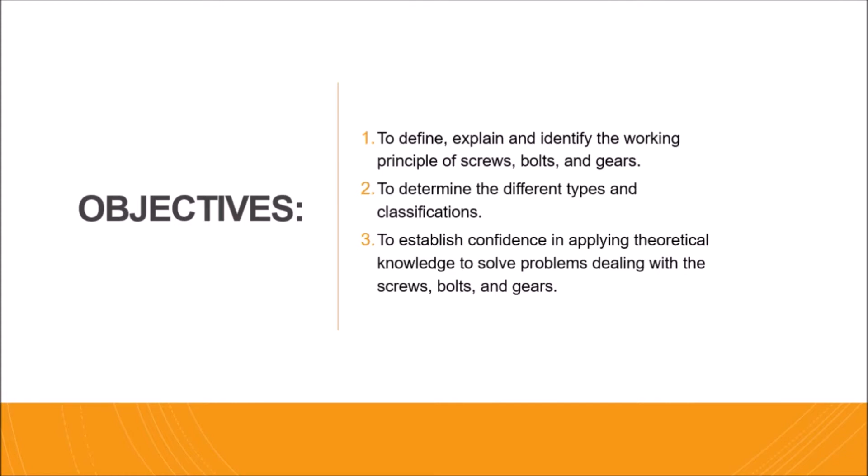Let's start with screws and bolts. So, what exactly are these two?

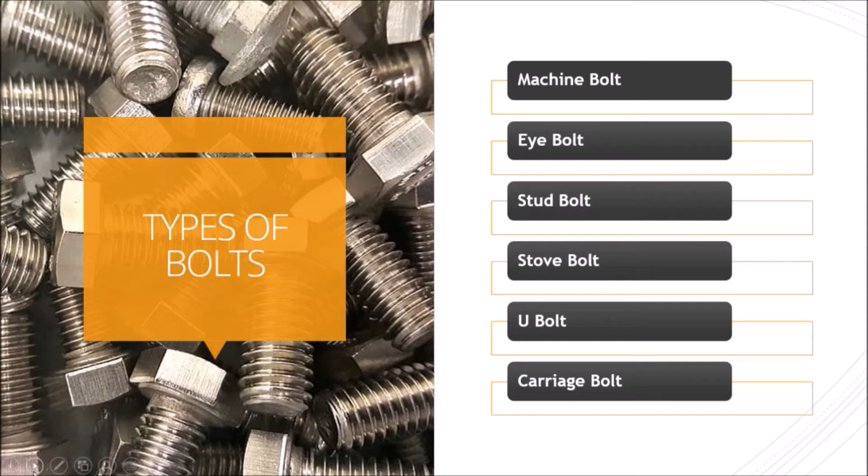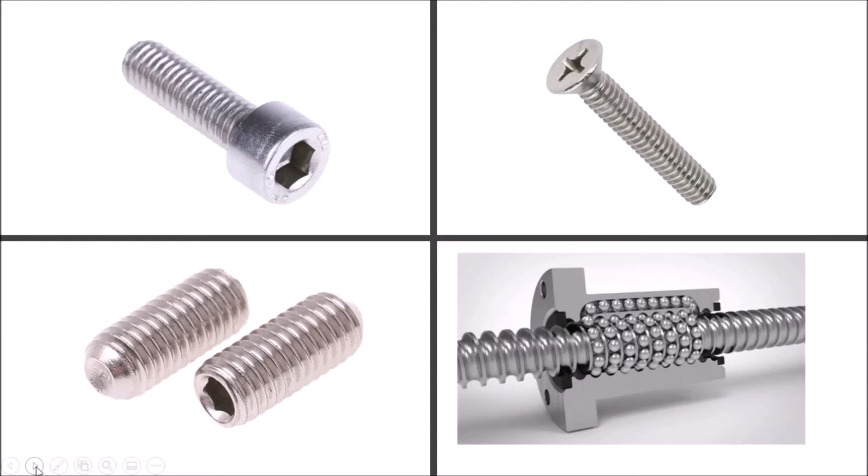These are the images of the four mentioned earlier. The first one is a cap screw. Cap and machine screws are used to clamp machine parts together, where either one of the parts has a threaded hole or in conjunction with a nut. These screws stretch when tightened, and the tensile load created clamps the parts together. If we look, it has a kind of cap.

Next is a machine screw, shown in the upper right. A machine screw is a type of fastener which, like other fasteners, is used to join two or more objects. Machine screws are unique because of their size. The American Society of Mechanical Engineers, or ASME, defines machine screws as featuring a diameter up to 0.75 inches.

Next is the set screw, shown on the lower left side. Set screws, socket set screws, or grub screws are a type of threaded fastener most often used for securing components in place. This generally means affixing two or more loose parts together, for example by holding one component tightly against or inside a second surface.

Lastly, at the lower right side, we have the power screw. This will be discussed further later on. A power screw is a mechanical device used to convert rotary motion into linear motion and to transmit power. Unlike threaded fasteners which are used to clamp machine members, power screws are used to transmit power, and common applications are screw jacks, which are used to lift weights.

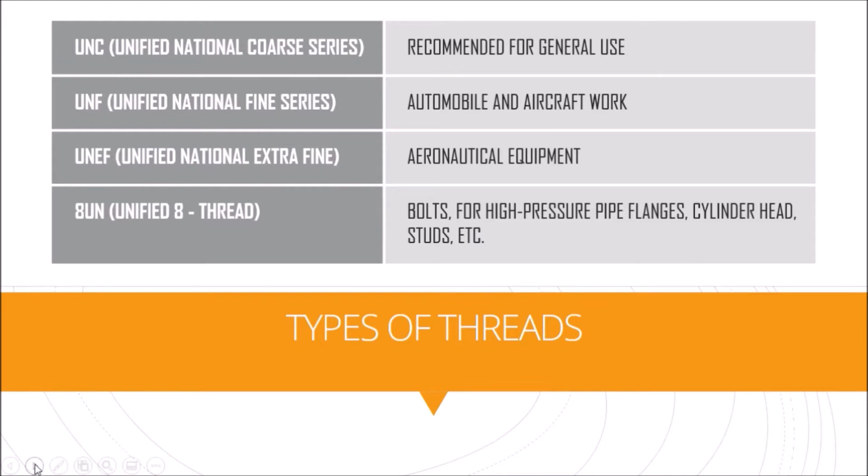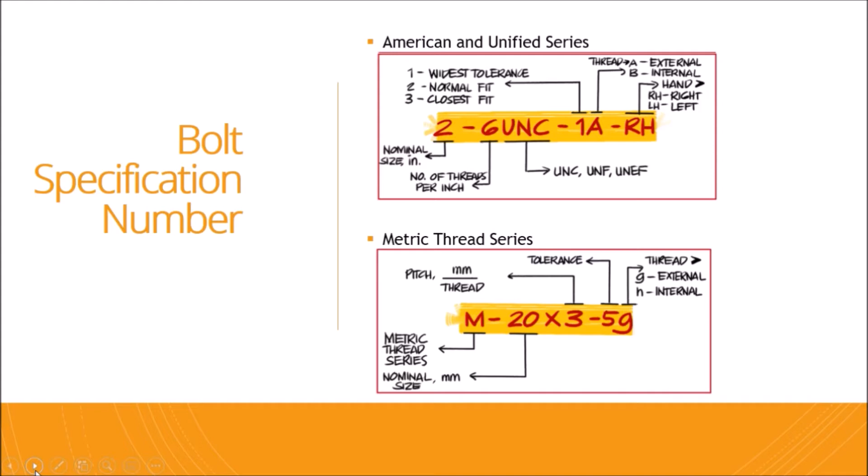Next is the pitch, measured in millimeters per thread, which is the 3 in the given example. And the tolerance, the 5G, is our tolerance, where 5 means the tolerance grade, and G or H could stand for external and internal. So, next.

Next is the form of threads for bolts. We have 3 different types here: the V-threads, Seller's screw thread, and the Whitworth thread. Let's first discuss the V-threads.

Metric ISO threaded screws are V-shaped at the outer edge and are self-locking, so they do not need a screw lock. The flank angle of V-thread is 60 degrees, and it's commonly used wherever fine adjustment with leads as fine as 0.0125 inch, or approximately 0.3175 millimeters, is critical, such as microscope stages. So the key distinction of V-threads is that they are V-shaped and use a 60-degree V-shape angle.

Next is the Seller's screw thread. It is a thread formed in a system of standard sizes proposed by Sellers in 1864, and it was later accepted as a standard in the USA, having a 60-degree flank angle with a flat top and foot. So the Seller's screw thread is similar to the V-thread, but its top and root parts are flat. The angle is also 60 degrees, and the root equals the pitch divided by 8. It was proposed by Sellers in 1864.

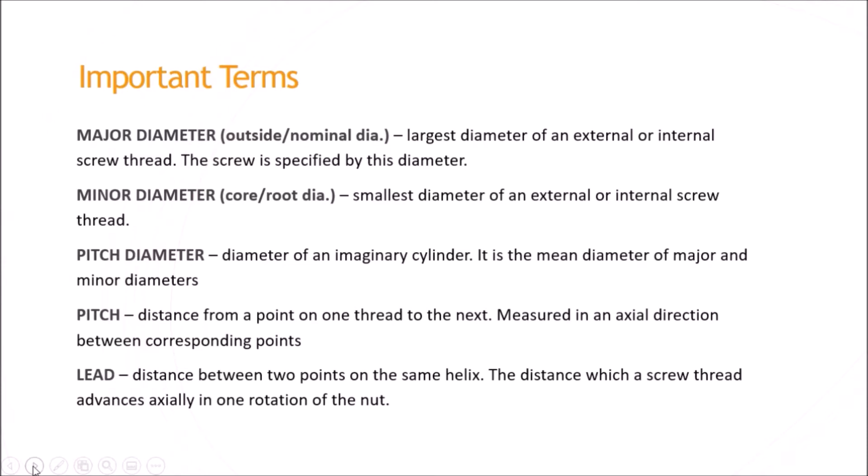Crest is the top surface of the thread, and the root is the bottom surface created by two flanks. The depth of the thread is the perpendicular distance between the crest and root. The flank is the surface joining the crest and root. Last is the angle of the thread, the angle included by the flanks of the thread.

These terms will be discussed later, and it is clear to understand in formulas and computations. Next slide, please.

So, stresses induced in bolts. Here are the formulas for the stresses. Next slide, please.

First is the shear stress, torsional, in the root of the threaded portion, where shearing stress is equal to 16 multiplied by torque over pi times inside diameter cubed.

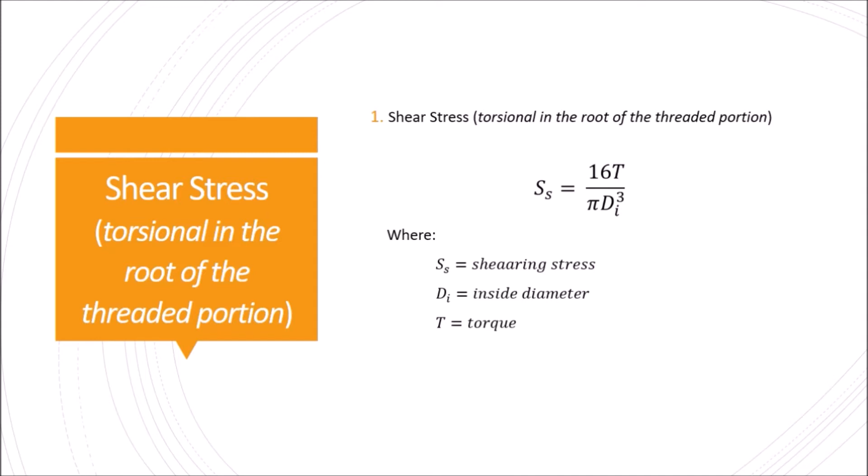Next slide, please. Next is the tensile stress at the root or stress area, where tensile stress equals applied load over root area, which equals applied load over stress area.

For number 3, third is compression stress at the threads. Compression stress equals applied load over pi over 4 multiplied by outside diameter squared minus inside diameter squared, times number of threads.

Also, root area and stress area are also needed because of the tensile stress. Next, please.

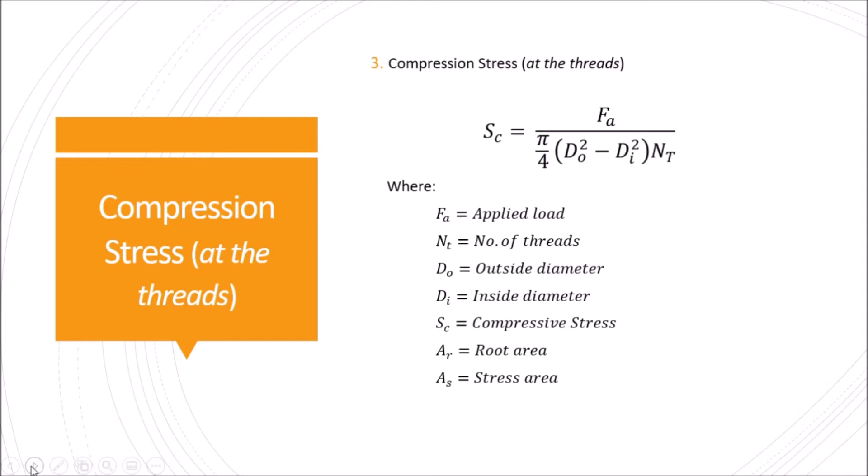Number 4, shear stress, simple, on the threads at the root. Shear stress equals applied load over pi times inside diameter times thickness times number of threads. The small t is the thickness.

So next, please. For number 5, for practical design, from Vallance, the permissible working stress equals bolt constant. Also, bolt constant equals 1,000 for bronze and 5,000 for carbon steel.

Also, 1,500 for alloy steel. So again, permissible working stress equals bolt constant multiplied by stress area raised to 0.418.

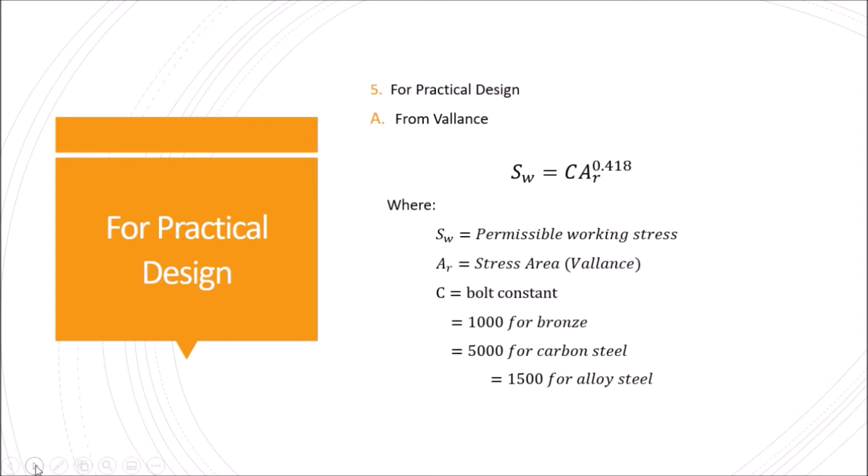So for letter B, from Faires, the design tensile stress equals yield strength over 6, multiplied by stress area raised to 0.50.

For the applied load from Vallance, applied load equals bolt constant multiplied by stress area raised to 1.418.

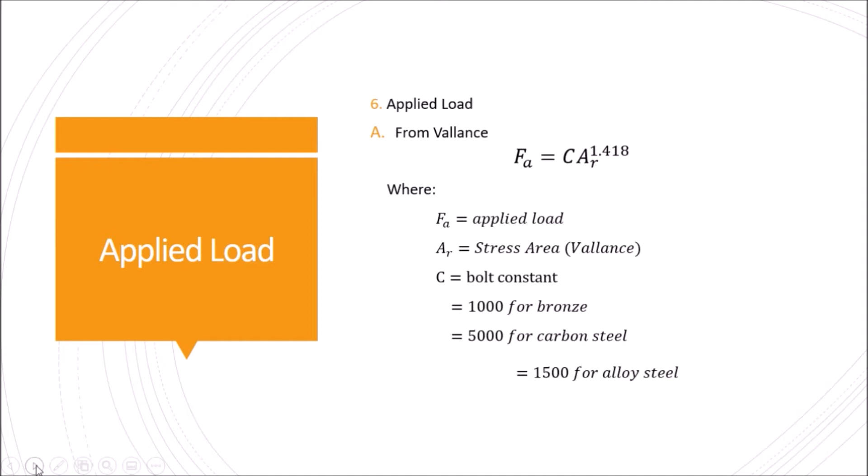Next slide, please. So from letter B, from Faires, the tensile load of Faires equals yield strength over 6, times stress area raised to 1.50.

And for the working strength of the bolt, working strength equals allowable working stress multiplied by 0.55 bolt diameter squared minus 0.25 bolt diameter.

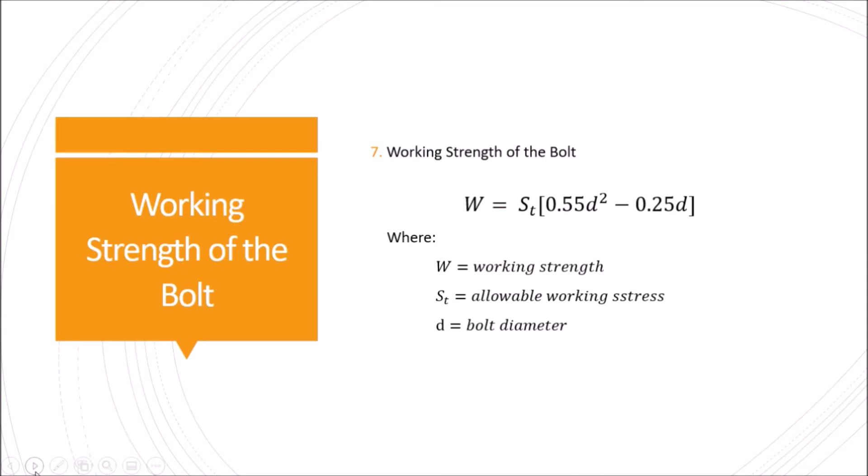As for the bolt spacing, it equals pi times bolt circle diameter over total number of bolts.

And for the bolt circle diameter, it equals inside diameter plus 2... again, bolt circle diameter equals inside diameter plus 2 bolt diameter.

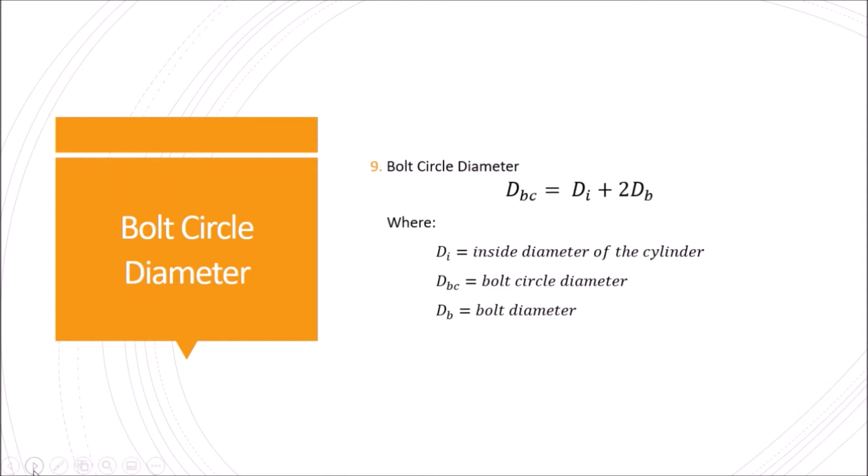Number 10, for the depth of tap, letter A for brittle materials, where H equals 1.5 times D, and H is the depth of tap. For letter B, for Vallance, the depth of tap equals 1.25 multiplied by D. And for steel, wrought iron, from Faires, the depth of tap equals nominal diameter. Again, D is the nominal diameter and H is the depth of tap.

For the initial torque from Vallance, first I will set the meaning of the equation. Fa is the applied load, Fi is the initial tension, T is for torque, D is the nominal diameter, H is the depth of tap. 0.15 is the constant for lubricated, and 0.20 is the constant for as received.

So from Vallance, T equals 0.20 applied load multiplied by nominal diameter. And from Faires, torque equals 0.20 initial tension multiplied by nominal diameter, or torque equals 0.15 initial tension multiplied by nominal diameter.

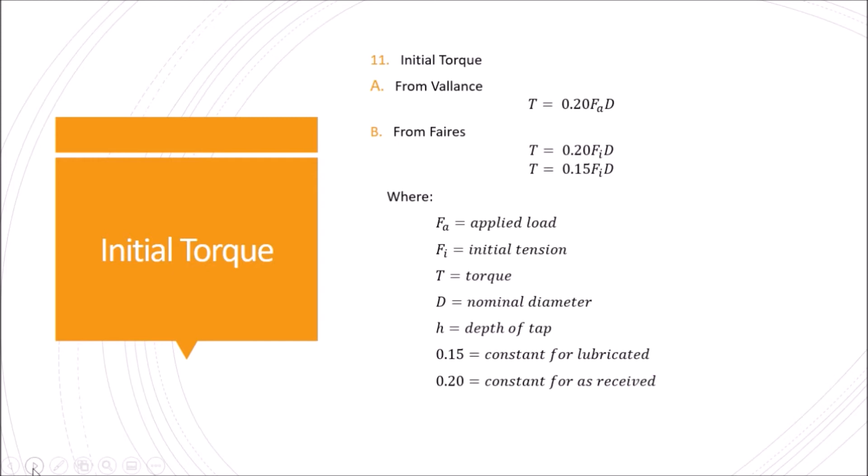So next slide, please. And for the initial tension, Fi is the initial tension and D is the nominal diameter, which means initial tension equals 16,000 multiplied by nominal diameter.

A note: conservative design uses root diameter in the calculation as the area handling the load. The latest design uses the stress area as the area handling the load.

Number 13, last is the bolt elongation. This will be the last equation for the stresses. So bolt elongation equals lead multiplied by number of turns.

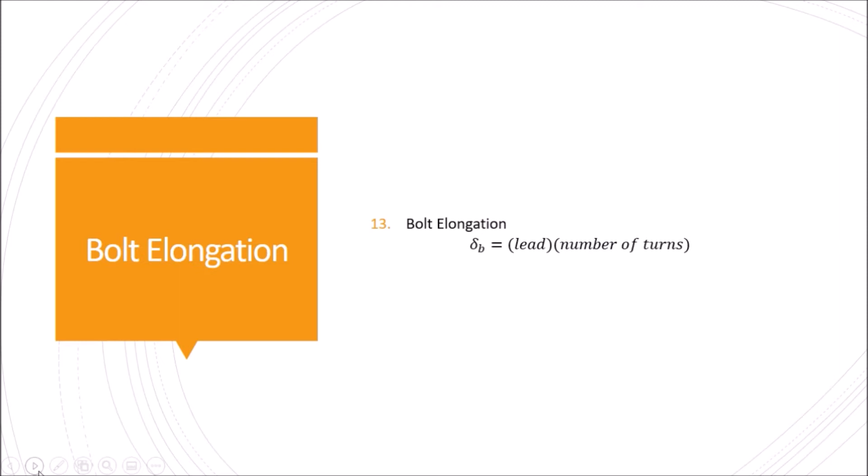Next is power screw.

So ano nga ba yung power screw? Nabanggit na yung power screw kanina na ang power screw is a mechanical device used to convert rotary motion into linear motion and to transmit power. Unlike the threaded fastener which are used to clamp the machine members, power screw are used to transmit power. So yung power screw ay hindi siya katulad ng ibang threaded fastener na ginagamit for clamps, at yung power screw ay ginagamit to transmit power.

At makikita natin sa figure kung ano ang itsura ng isang power screw. Nandito yung kanyang pitch, which pitch is simply a measurement of the distance between the threads. And the lead angle is the helix angle of the thread based on the lead distance. A single start thread has a lead distance equal to its pitch and in turn has a relatively small lead angle.

So ano rin ba yung lead na sinasabi? Lead is a measurement of how far a screw will travel after a complete revolution.

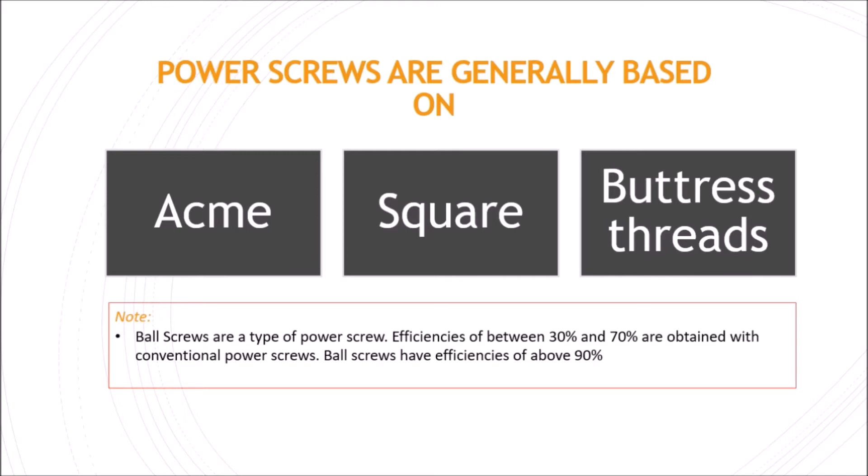So forms of threads for power screws. First is square thread. Square thread is a common screw thread form used in high-load applications such as lead screws and jack screws. It gets its name from the square cross-section of the thread. Sinasabi dito na kaya tinawag siyang square thread is based on kung anong itsura ng kanyang thread, which is square. At yung crest niya is makukuha sa pitch divided by 2, at yung kanyang height ng thread is madedetermine sa 7/16 multiplied by the pitch.

And next is ACME thread. ACME thread is an American screw thread having a section that is mean between the V threads and the square threads. Makikita natin dito na ang ACME thread has a 29-degree angle, at yung kanyang root is madedetermine sa pamamagitan ng 0.370 multiplied by the pitch minus 0.0062. And yung height ng kanyang thread ay 0.5 multiplied by the pitch plus 0.01.

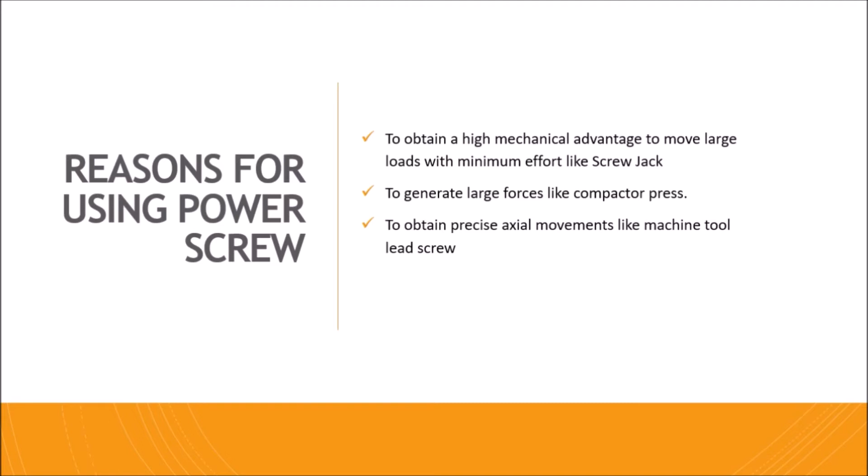So formula for power screw number 1 is torque required to overcome collar friction. T sub C equals coefficient of friction on collar multiplied by the load, multiplied by the quantity mean diameter divided by 2. Or we can use the formula of coefficient of friction on collar multiplied by the load multiplied by the quantity of outside radius plus inside radius divided by 2.

And number 2 formula is torque applied to turn the screw. First is raising the load. T sub F equals load multiplied by the mean diameter divided by 2 multiplied by the quantity of B tan multiplied by lead angle plus coefficient of friction divided by B minus F multiplied by tan multiplied by lead angle.

And next is lowering the load. T sub F equals load multiplied by mean diameter divided by 2 multiplied by quantity of B tan multiplied by lead angle minus coefficient of friction divided by the B plus F multiplied by tan multiplied by the lead angle.

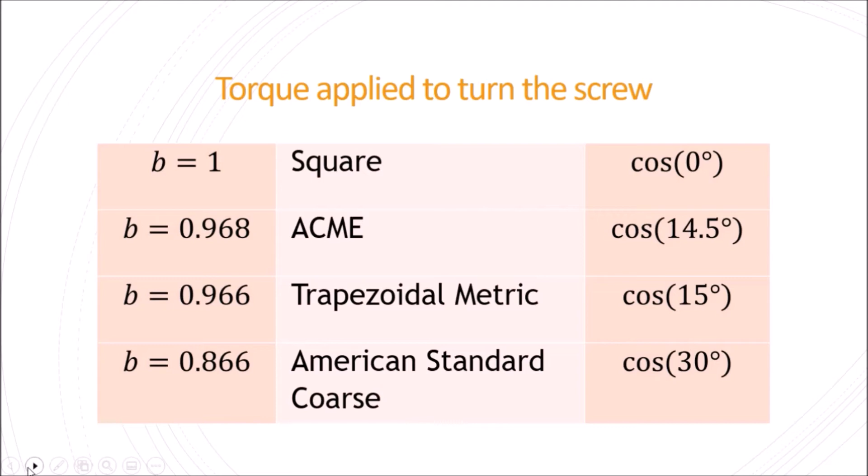And for the third formula is total torque required to operate the screw. So total torque equals frictional torque on the threads plus frictional torque on the collar.

And for the fourth formula is power input of the screw. Power input equals 2 pi multiplied by total torque multiplied by rotative speed.

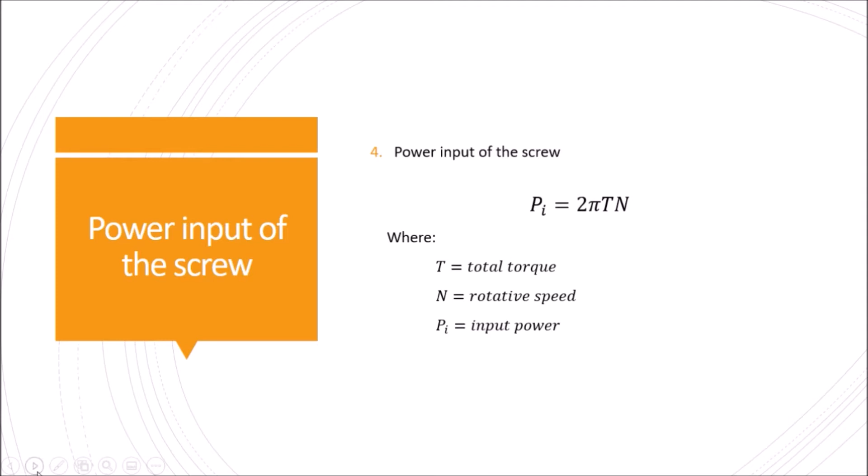Next is power output of the screw. Power output, or P sub O, equals load multiplied by velocity.

Next is efficiency. Efficiency equals output power divided by input power, or we can use the formula: efficiency equals load multiplied by velocity, divided by 2 pi multiplied by total torque multiplied by the rotative speed.

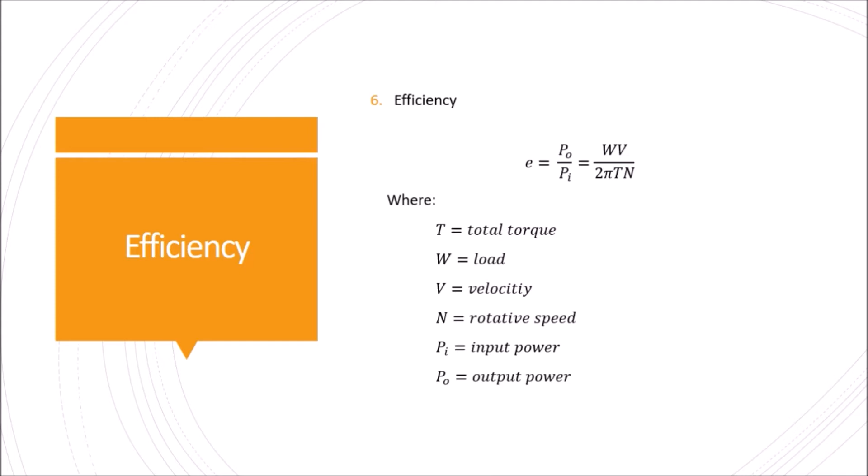And for the linear velocity, our formula is velocity equals rotative speed multiplied by the lead. Next is lead angles. Lead angle equals tan raised to -1 of the quantity: lead divided by pi multiplied by the mean diameter.

And for the formula for the lead, L equals P if we have a single thread. For double thread, our formula is lead equals 2 multiplied by pitch. And if the thread is triple, our formula is L equals 3 multiplied by the pitch.

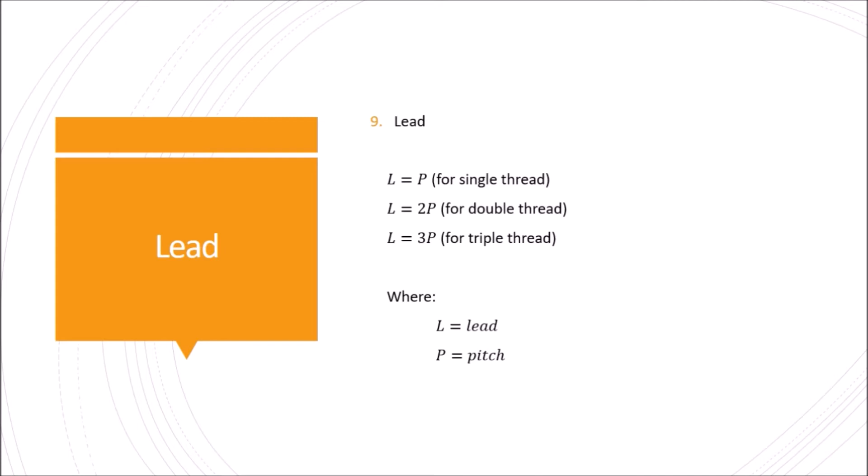Gears are mechanisms that mesh together via teeth and are used to transmit rotary motion from one shaft to another. Gears are defined by two important items: radius and number of teeth. They are typically mounted or connected to other parts via a shaft or base.

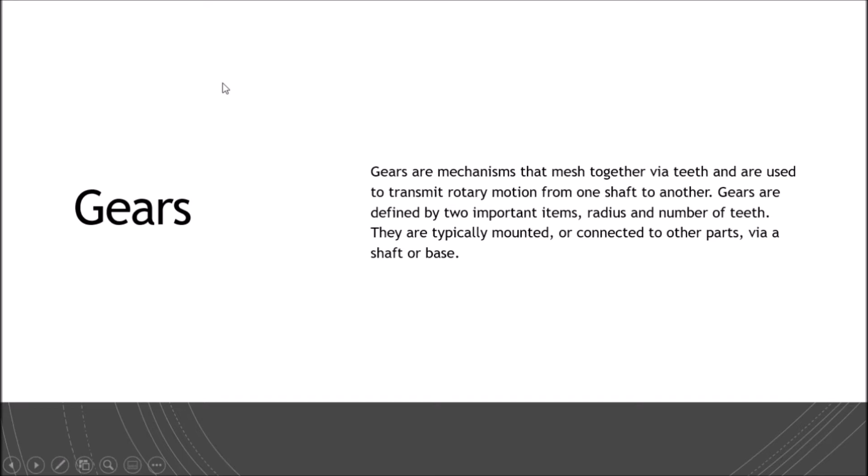Classification of gears according to the nature of the axis. Parallel axis: external spur gears have teeth that are cut on the outside surface of the cylinder. Internal spur gears are gear teeth generated on the internal diameter of a cylinder.

Twisted spur gear is also known as a helical gear; their teeth are not parallel to the axis. Herringbone gear is a type of double helical gear. It is a special type of gear that is a side-to-side combination of two helical gears of opposite hands.

Rack and pinion is a type of linear actuator that comprises a circular gear engaging a linear gear, which operate to translate rotational motion into linear motion.

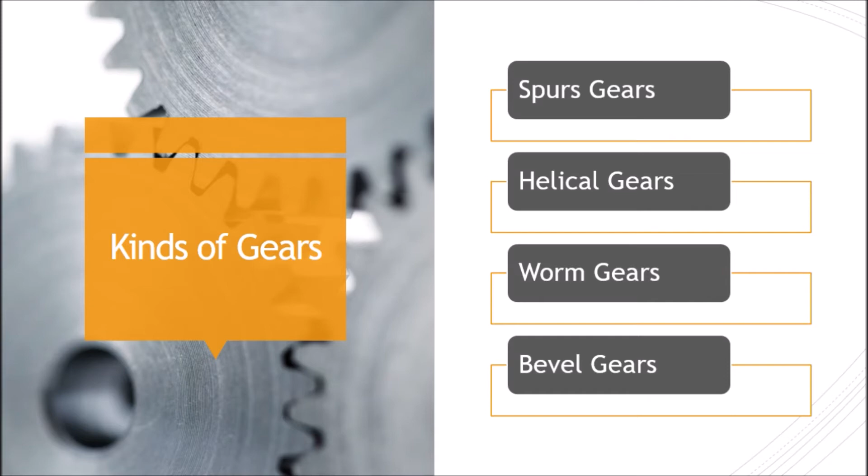Next. We have four kinds of gears: spur gears, helical gears, worm gears, and bevel gears.

Important terms: pitch circle, an imaginary circle by pure rolling action, has the same motion as the actual gear. Pitch circle diameter is the diameter of the circle; gear size is given by the pitch circle diameter. Pitch point is the point of tangency of the pitch circle. Pitch surfaces is the surface of the rolling disc.

Addendum: radial distance between the pitch circle and the addendum circle. The dedendum is a radial distance from the pitch circle to the root circle, the bottom of tooth space. Addendum circle, or outside circle, bounds the outer ends of the teeth. Root circle bounds the bottom of the teeth.

Next. Whole depth, or total depth: radial distance between the addendum and the dedendum, the sum of the addendum and dedendum. Working depth: radial distance from the addendum circle to the clearance circle, equal to the sum of the addendums of both gears. Clearance: radial distance between the working depth circle and the root circle, the dedendum minus the mating addendum.

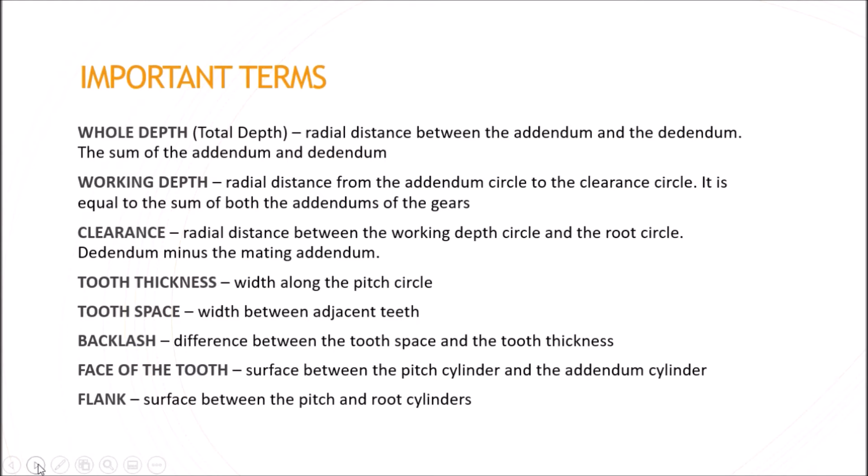Topland: surface of the top of the tooth. Bottomland: surface of the bottom of the tooth space. Face width: length of teeth in an axial direction. Profile: curve formed by the face and flank. Fillet radius connects the root circle to the profile of the tooth.

Pinion: the smaller of two meshing gears. Gear: the larger of two meshing gears. Path of contact: the path traced by the point of contact from the beginning to the end of engagement.

Length of the path of contact: length of the common normal cut off by the addendum circles of the gear and pinion.

Arc of contact: path traced from the beginning to the end of engagement of a given pair of teeth. Arc of approach: portion of the path of contact from the beginning of engagement to the pitch point. Arc of recess: portion of the path of contact from the pitch point to the end of engagement of a pair of teeth.

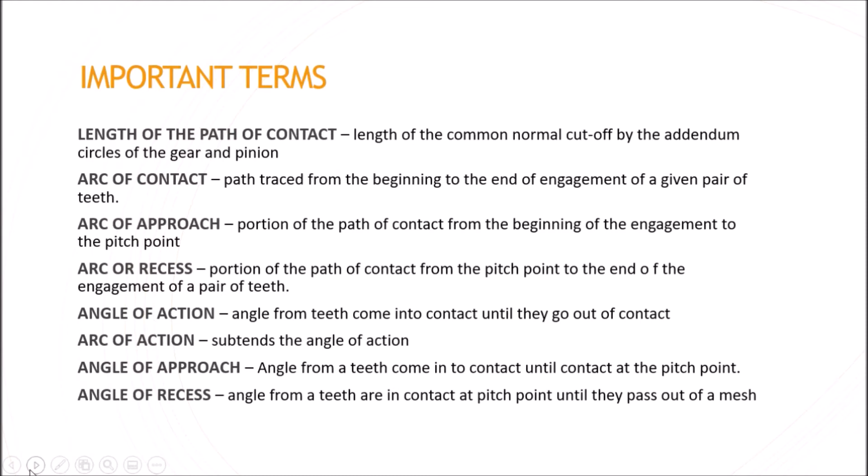Velocity ratio: angular velocity of the driver divided by the driven gear. Gear ratio: number of teeth in gear over pinion. Contact ratio: ratio of the length of arc of contact to the circular pitch.

Base circle: circle where the involute is generated. Degree of involute defines the base circle for a particular pitch circle. Pressure angle: angle between the common normal to the two gears at the point of contact and the common tangent at the pitch point.

Spur gears are gears having teeth that are straight and arranged parallel to the axis of the shaft that carries the gear. The curved shape of the faces of the spur gear's teeth has a special geometry called the involute curve.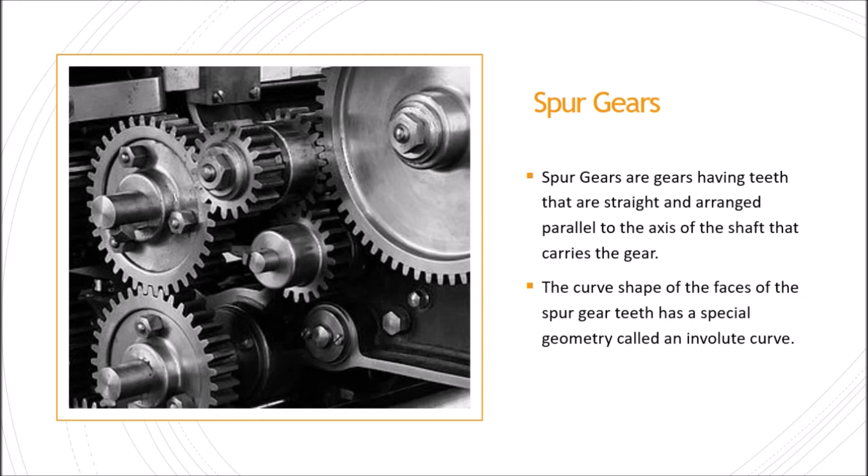Spur gear nomenclature. Addendum: the height by which a tooth projects beyond the pitch circle.

Dedendum: the depth of a tooth space below the pitch circle, generally greater than the addendum of the mating gear to provide clearance.

Clearance or working depth circle.

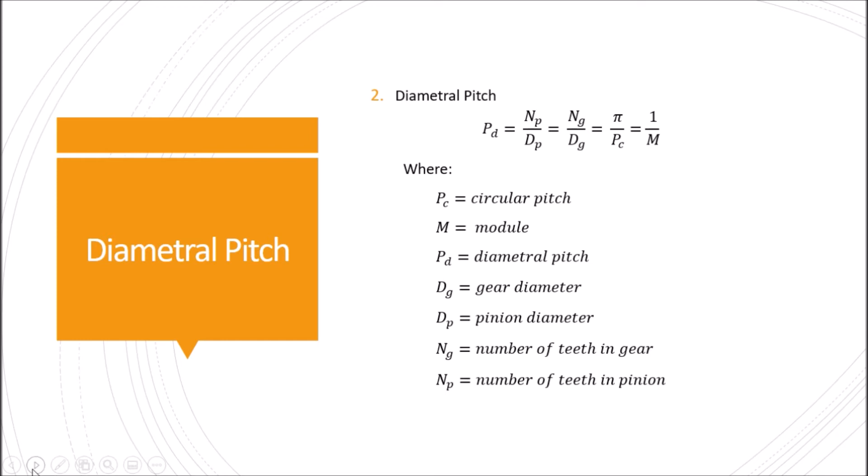Clearance equals dedendum minus addendum, C equals full depth minus working depth.

Addendum equals 1 over diametral pitch.

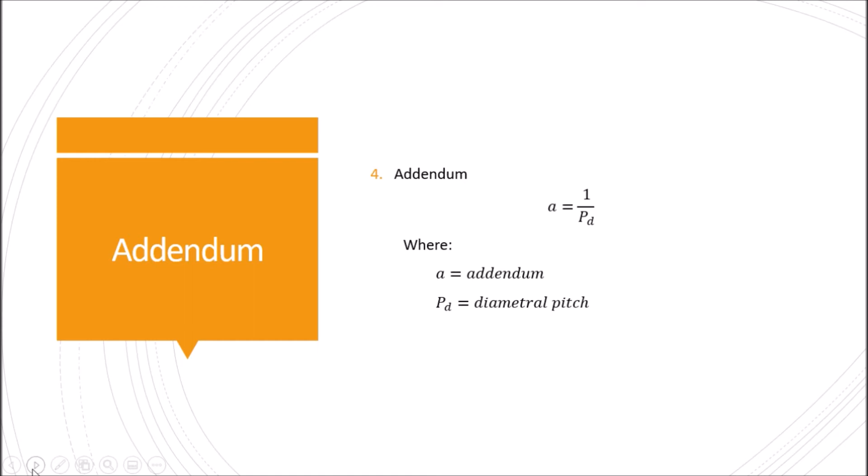Outside diameter for pinion: outside diameter of pinion equals pinion diameter plus 2A, equals number of teeth in pinion plus 2, all over diametral pitch. For gear: outside diameter of gear equals number of teeth in gear plus 2 over diametral pitch, equals gear diameter plus 2A.

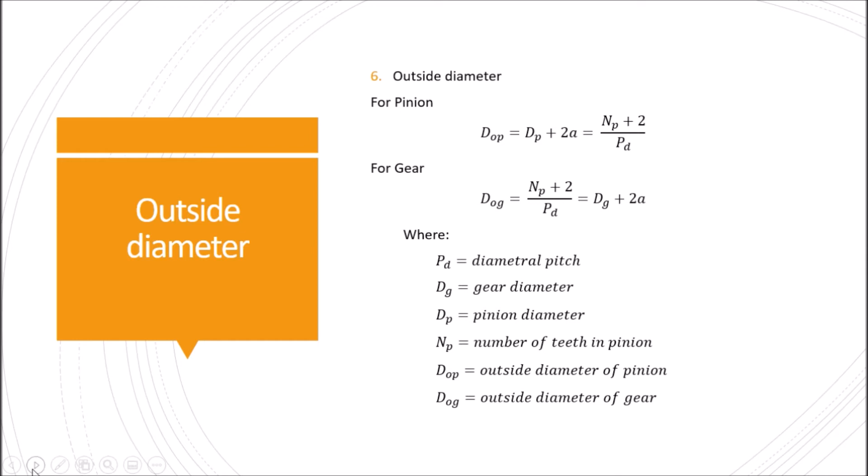Root diameter for pinion: root diameter of pinion equals pinion diameter minus 2D. For gear: root diameter of gear equals gear diameter minus 2D.

Whole depth: whole depth equals addendum plus dedendum, equals working depth plus clearance.

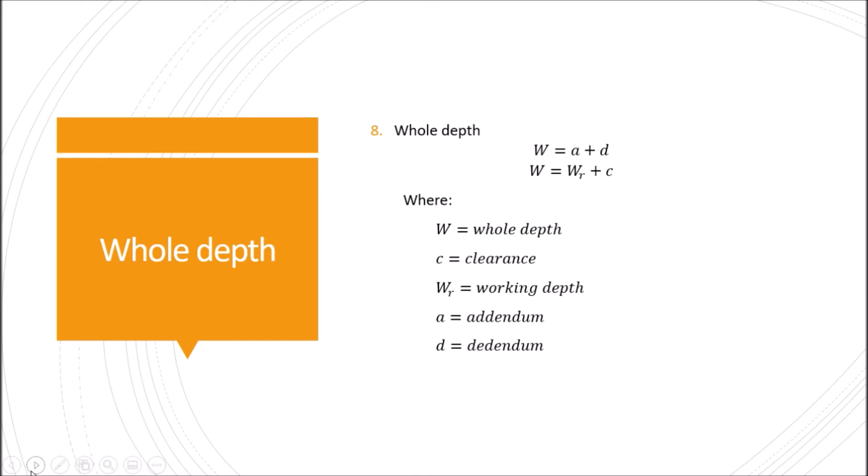Working depth equals 2A, equals whole depth minus clearance.

Tooth thickness for backlash equal to 0: tooth thickness equals circular pitch over 2. For backlash not equal to 0: T equals circular pitch minus backlash, all over 2.

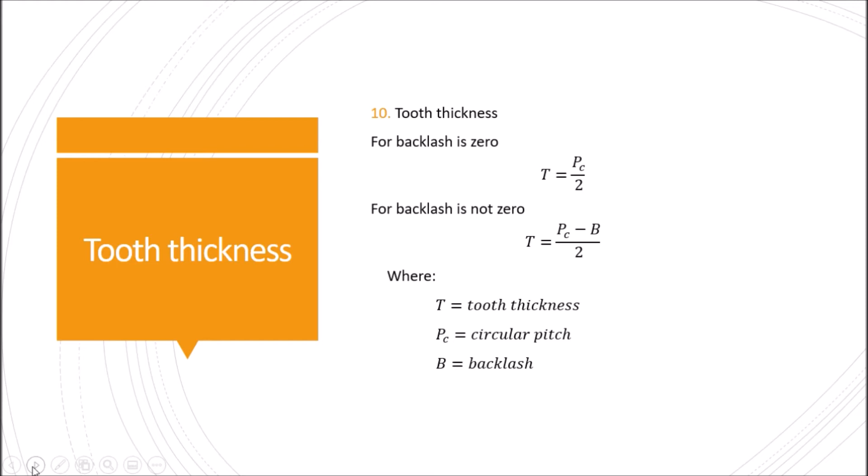Tooth space equals tooth thickness plus backlash.

Base circle diameter for pinion: base diameter of pinion equals pinion diameter times cosine theta.

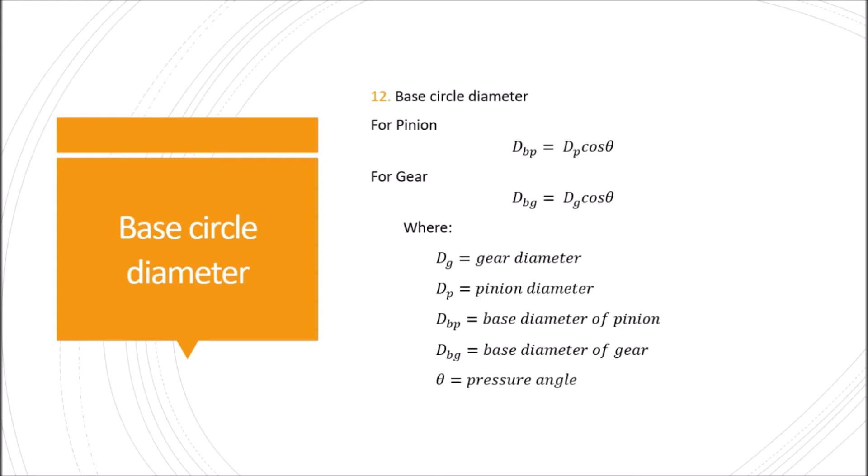Center distance between gears equals gear diameter plus pinion diameter, all over 2, for external contact. For internal contact: center distance between gears equals gear diameter minus pinion diameter, all over 2.

Backlash equals tooth space minus tooth thickness.

Backlash equals 0.03 over diametral pitch to 0.04 over diametral pitch.

Face width: 2.5 times circular pitch is less than face width, which is less than 4 times circular pitch; 8 over diametral pitch is less than face width, which is less than 12.5 over diametral pitch.

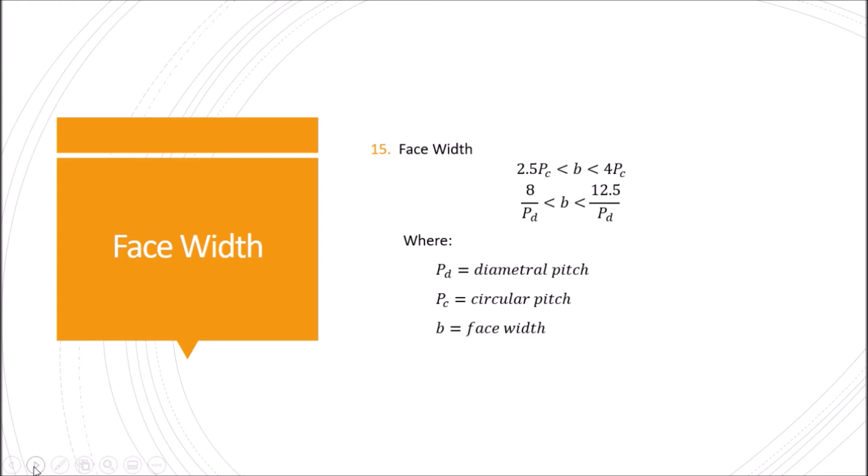Design calculation for spur gears.

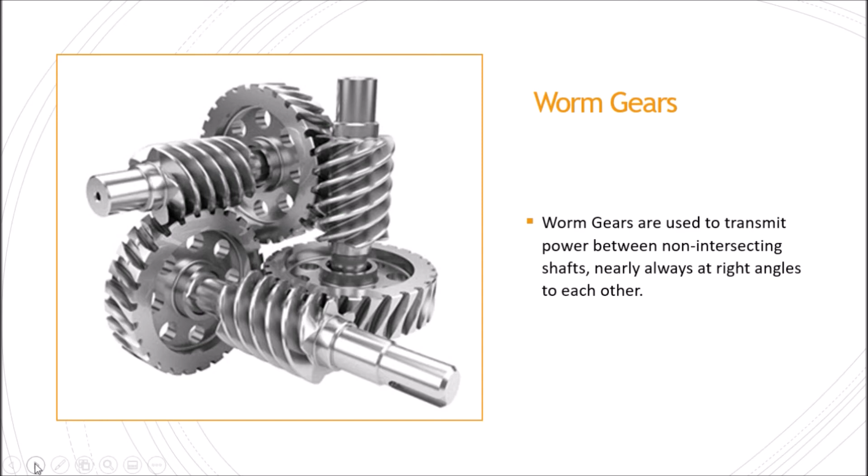Next, worm gear nomenclature. A worm gear is a staggered shaft gear that creates motion between shafts using threads that are cut into a cylindrical bar to provide speed reduction.

The combination of a worm wheel and worm are the components of a worm gear. The speed reduction is determined by the number of worm threads and the number of teeth on the worm wheel. One of the major benefits of worm gears is their ability to offer gear reduction and torque multiplication in a small footprint.

In worm gear assemblies, the axial pitch of the worm must be equal to the circular pitch of the larger gear in the first determination during assembly. The circular pitch is the distance between the teeth points on the pitch diameter, with axial pitch being the axial distance between the points of the teeth on the worm.

The threads of the worm may be left-handed or right-handed. The lead refers to the distance a point on a thread travels in one revolution of the worm. The lead angle is the angle that is tangent to the thread helix on the pitch of the cylinder and the plane normal to the axis of the worm.

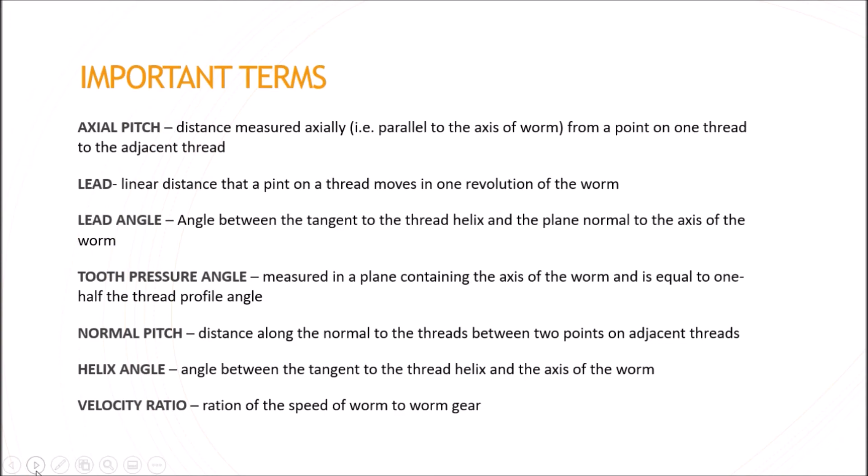The tooth pressure angle is measured in a plane containing the axis of the worm and is equal to half the thread profile angle. The normal pitch is the distance along the normal to the threads between two points on adjacent threads. The helix angle is the angle between the tangent to the thread helix and the axis of the worm, and the velocity ratio is the ratio of the speed of the worm to the worm gear.

Next, the formulas of worm gears.

Next, the circular pitch, or P sub C, is equal to pi multiplied by the gear diameter, all over the number of teeth in the gear.

Next, the diametral pitch is equal to the number of teeth in the gear, all over the gear diameter.

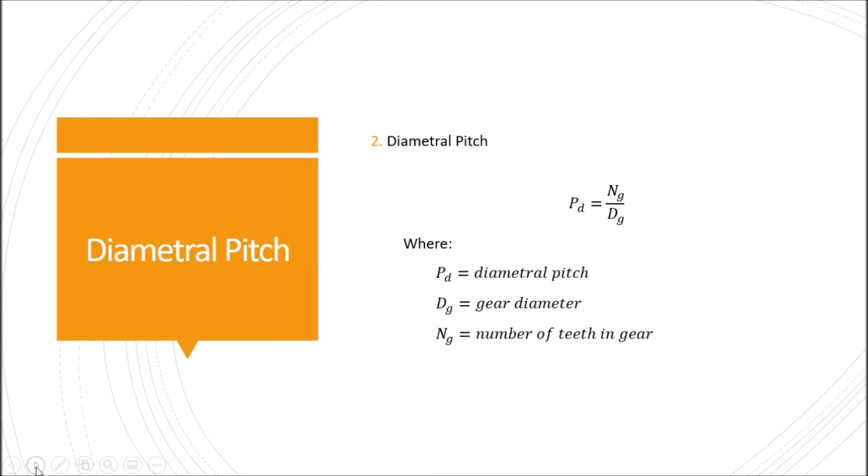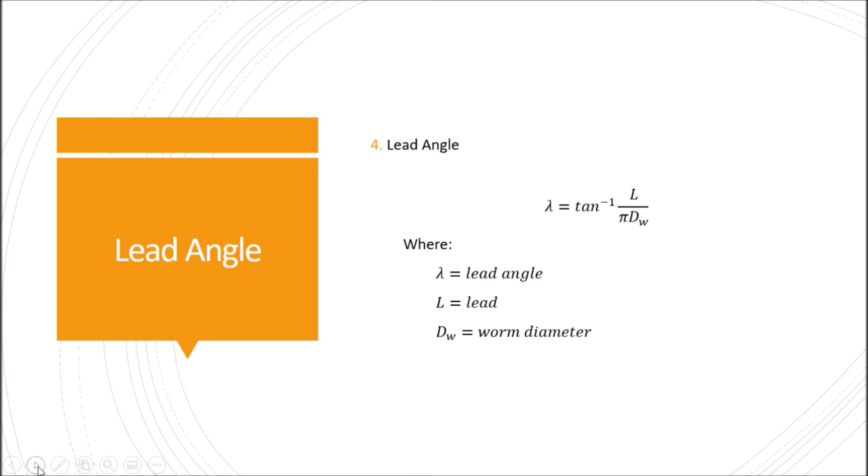And the lead is equal to the number of threads multiplied by the axial pitch. The lead angle is equal to tan raised to -1 of the lead over pi multiplied by the worm diameter.

Next, pitch line velocity. For the worm, the pitch line velocity of the worm is equal to pi multiplied by the worm diameter multiplied by the rotative speed of the worm. And for the gear, the pitch line velocity of the gear is equal to pi multiplied by the gear diameter multiplied by the rotative speed of the gear.

Next, the torque transmitted by the worm. The torque transmitted is equal to the tangential force on the worm multiplied by the worm diameter over 2.

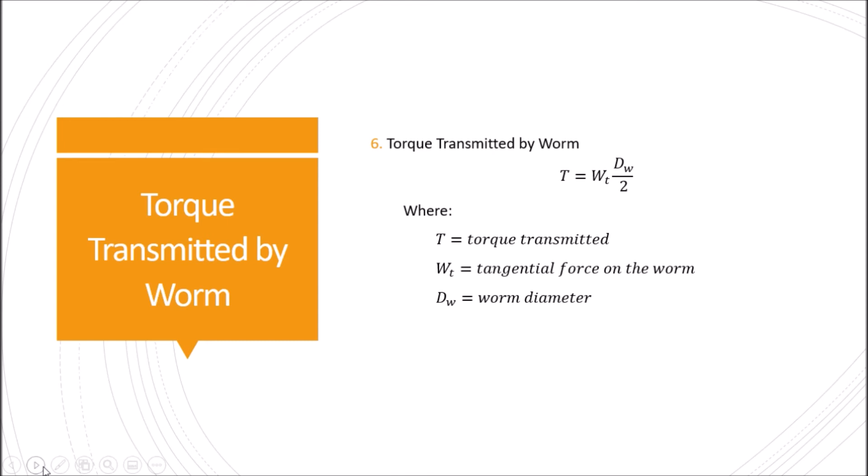Next, the separating force is equal to the tangential force of the gear multiplied by sine of the normal pressure angle, all over cosine of the normal pressure angle multiplied by cosine of the lead angle, minus the coefficient of friction multiplied by sine of the lead angle.

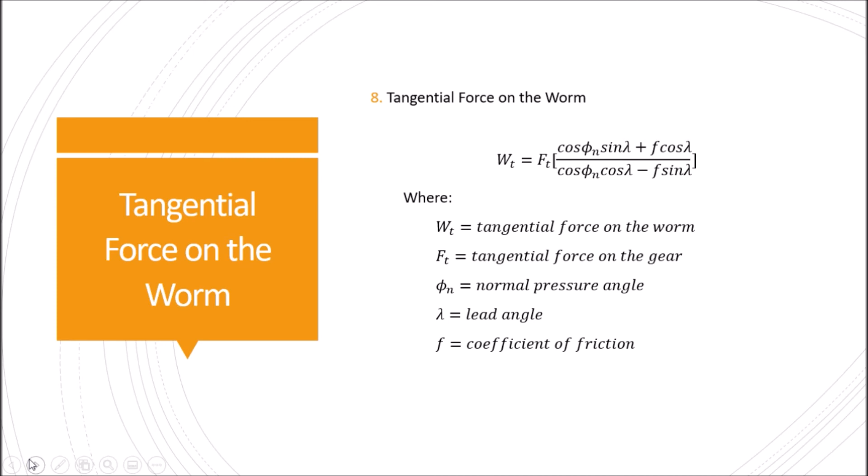Next, the tangential force on the worm is equal to the tangential force on the gear multiplied by cosine of the normal pressure angle multiplied by sine of the lead angle, plus the coefficient of friction multiplied by cosine of the lead angle, all over cosine of the normal pressure angle multiplied by cosine of the lead angle, minus the coefficient of friction multiplied by sine of the lead angle.

Next, the efficiency of the worm gear. Efficiency is equal to tangent multiplied by cosine of the normal pressure angle, minus the coefficient of friction multiplied by tangent of the lead angle, all over cosine of the normal pressure angle multiplied by tangent of the lead angle, plus the coefficient of friction.

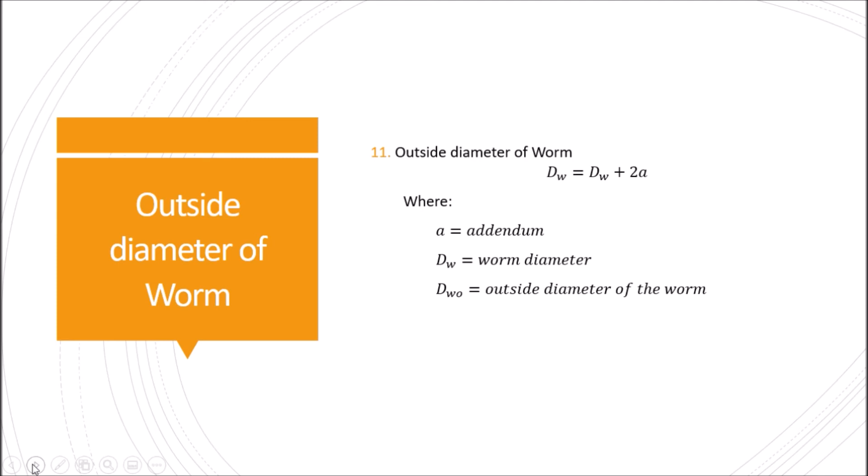Next, the worm diameter is equal to the center distance raised to the 0.875 power, over 2.2.

Design calculations in worm gears. Next, the beam fatigue strength of the teeth: the beam fatigue strength is equal to the endurance stress multiplied by the Lewis form factor multiplied by the face width, all over the normal diametral pitch. This is equal to the endurance stress multiplied by the Lewis form factor times face width multiplied by the normal circular diametral pitch, all over pi.

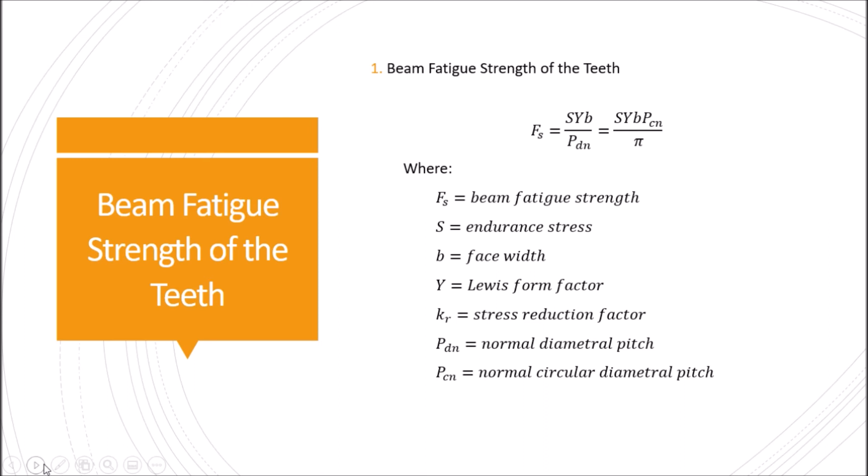Next, the dynamic load for worm gear teeth: the dynamic load is equal to 1200 plus the pitch line velocity, all over 1200, multiplied by the transmitted load.

The wear load is equal to the gear diameter multiplied by the face width and the wear factor.

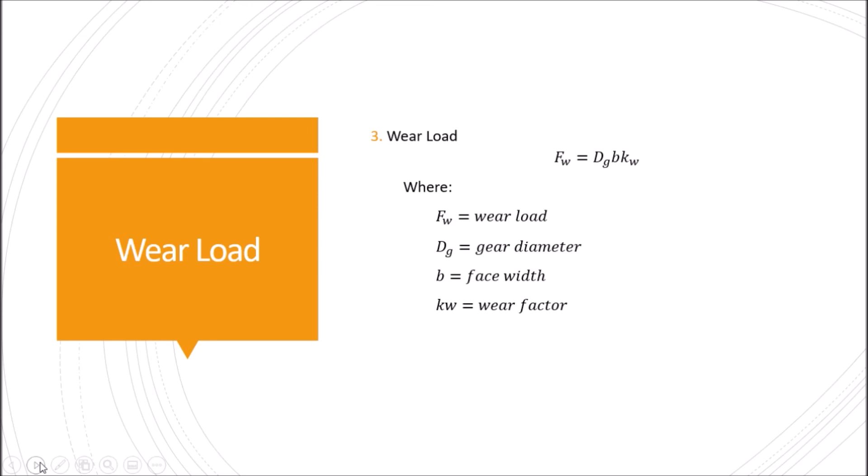In thermal capacity, the heat dissipated is equal to 1 minus efficiency multiplied by the input power.

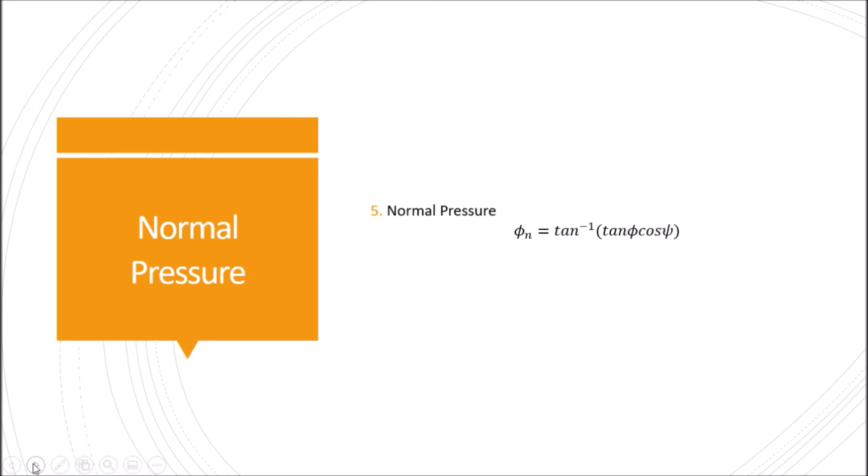Next, in normal pressure, the normal pressure is equal to tangent raised to -1, multiplied by the tangent of phi cosine psi.

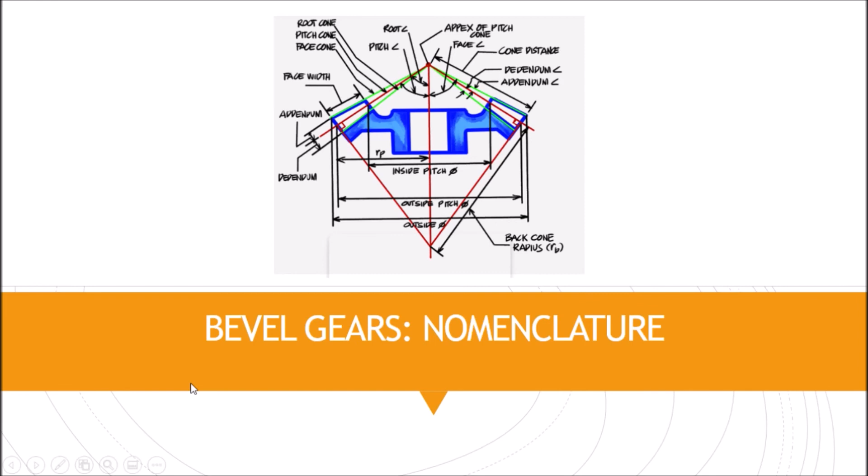Types of bevel gear. Meron tayong 5: straight bevel gears, spiral bevel gears, Zerol bevel gears, hypoid gears, at spiroid gears.

Sa straight bevel gears natin, it is usually used for pitch line velocities up to 1,000 feet per minute or 5 meters per second when the noise level is not an important consideration. They are available in many stock sizes and are less expensive to produce than other bevel gears, especially in small quantities. Kadalasan daw makikita ito sa mga low speed drives ng ating vehicle, makikita rin sa mga automobile differential gear system and other industrial applications.

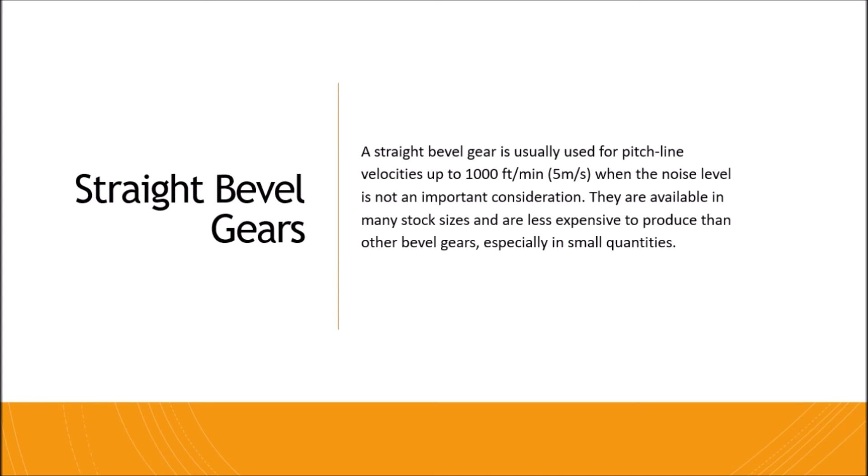Spiral bevel gears is the one with spiral angle. These gears are recommended for higher speeds and where the noise level is an important consideration. Spiral bevel gears are the bevel counterpart of the helical gear. The pitch surfaces and the nature of contact are the same as for straight bevel gear except for the difference brought about by the spiral shaped teeth.

Ang pangalan na spiral bevel gear ay nagmula sa shape nito na spiral shaped teeth. Kumpara sa straight bevel gear natin na maingay, yung spiral bevel gear naman natin ay mas tahimik. Kadalasan ito ginagamit sa mga vehicle transmission as drive from the drive shaft.

The Zerol bevel gear is a patented gear having curved teeth with zero spiral angle. The axial thrust loads permissible for Zerol bevel gears are not as large as those for the spiral bevel gears, and so are often used instead of straight bevel gears. The Zerol bevel gear is generated by the same tool used for a regular spiral bevel gear.

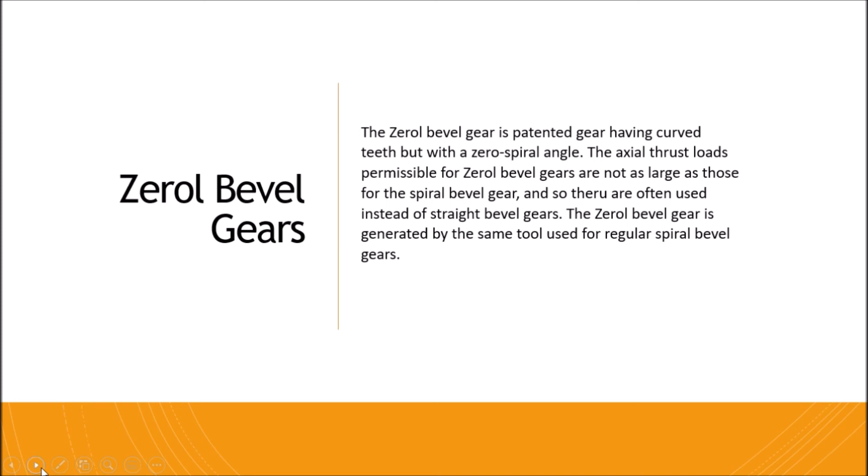Hypoid gears are frequently desirable, as in the case of automotive differentials, to have gearing like bevel gears but with the shaft offset. These gears are called hypoid gears because their pitch surfaces are hyperboloids of revolution. The tooth action between such gears is a combination of rolling and sliding along a straight line and has much in common with that of a worm gear.

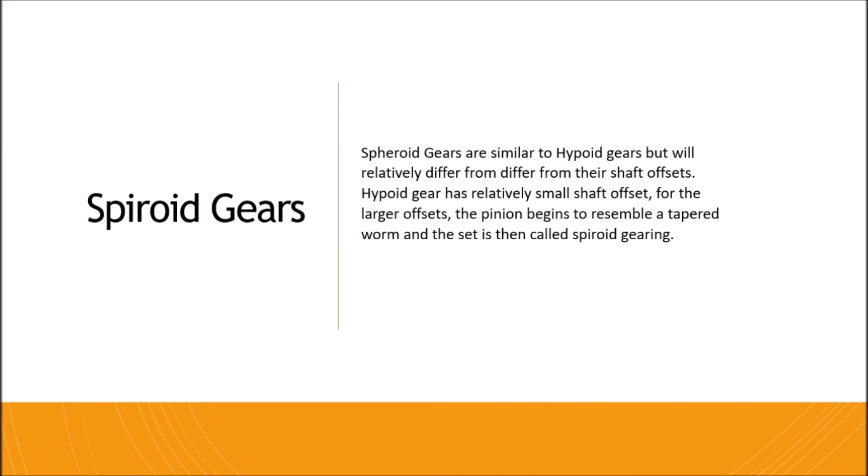Spiroid gears are similar to hypoid gears but differ in their shaft offsets. Hypoid gears have relatively small shaft offset; for larger offsets, the pinion begins to resemble a tapered worm and the set is then called a spiroid gear. So mas malaki yung kanyang shaft offset kumpara sa ating hypoid gear.

Formulas in bevel gears: cutting or root angle. Omega natin ay equal sa ating cutting angle, gamma is equal sa pitch angle, sabay naman yung delta ay equal sa dedendum angle. So, yung cutting angle ay equal sa ating pitch angle minus the dedendum angle.

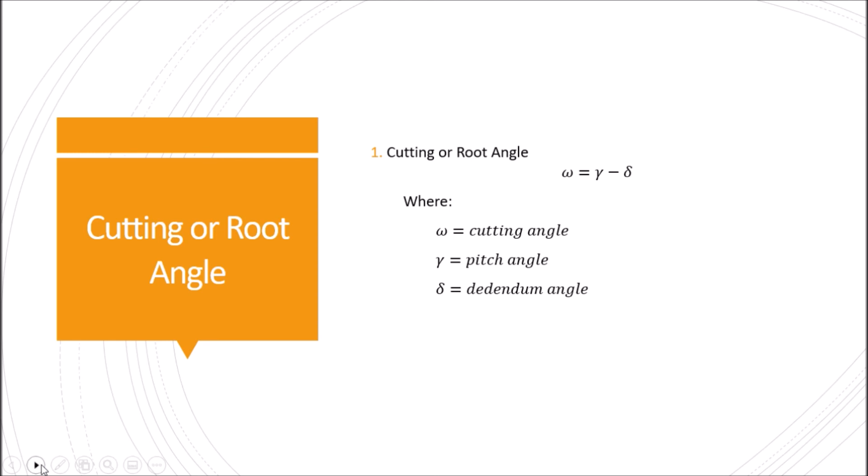Sa face angle natin, beta is equal to face angle, gamma is equal to pitch angle, at yung alpha natin is equal to addendum angle. So, para makuha yung face angle, add lang natin yung pitch angle at addendum angle.

Pitch angle. For our pinions, gamma P or pitch angle of the pinion is equal to tan negative 1 times radius of the pinion over radius of the gear, equal to tan negative 1 number of teeth in pinion over number of teeth of gears. For our gears, tan negative 1 radius of gear over radius of gear equal to tan negative 1 number of teeth in gear over number of teeth in gear.

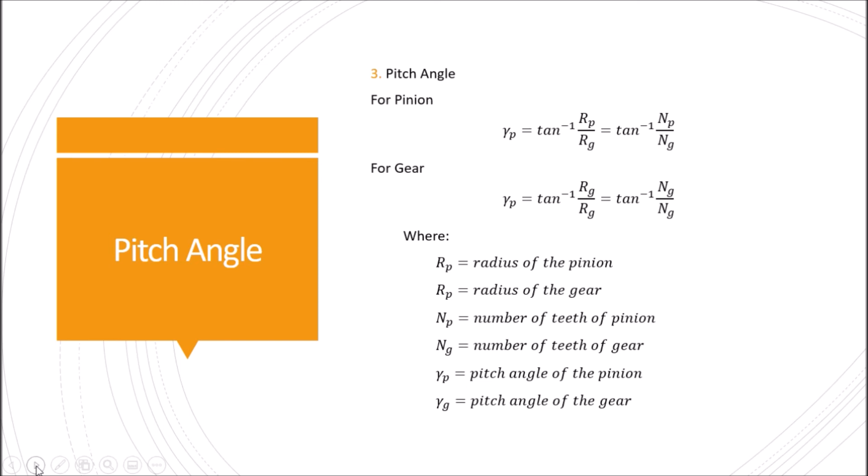Length of cone, L is equal to length of the cone, with RP as the radius of the pinion and RG as the radius of the gear. L is equal to the quantity radius of the pinion squared plus radius of the gear squared, to the power of 0.5.